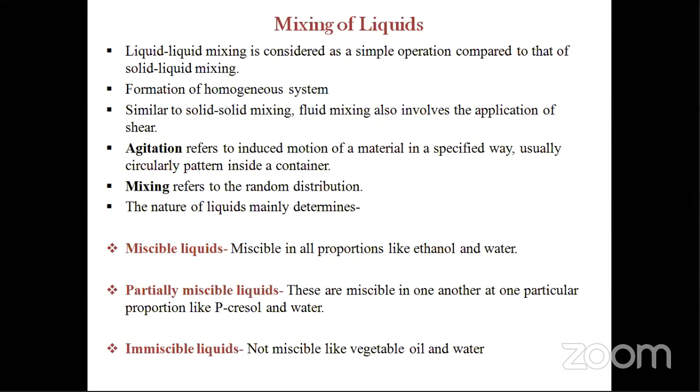Now coming to the applications of liquid mixing. What type of application is important in pharmaceutical industry as well as normal laboratory practice? If you are mixing two types of liquids, or mixing cold solutions, in between the mixing process you may need to give warmth to the liquid during mixing, or heat is produced during mixing. So you may generate heat using a burner during mixing, or another process is to directly incorporate a hot liquid into the cold liquid. When you incorporate the hot liquid directly into the cold liquid, both liquids mix with each other to give a homogeneous, warm mixture. By this process, you can transfer heat from one phase to another. This is the first advantage of liquid mixing, promoting heat transfer from one phase to another.

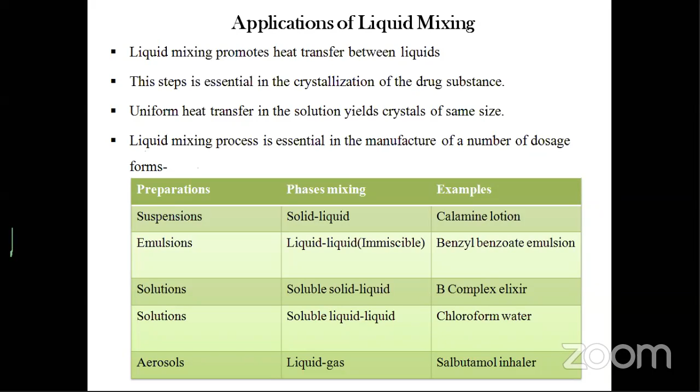So these are some of the popular dosage forms we can manufacture using mixing applications or the liquid mixing process.

Now coming to the mechanisms, what type of mechanism are we using in this mixing process? There are four types of mechanisms used in liquid mixing. The first one is bulk transport. Bulk transport means movement of a large portion of material from one location to another.

When it comes to liquid and solid mixing, what happens? A large amount of solid, due to the presence of liquid, transfers from one phase to another phase. Here bulk means the solid portion. If we replace the solid with immiscible liquids, when mixed, one portion of the immiscible liquid transforms from a large portion to smaller locations. This happens according to an ascending order, depending on concentration; the large concentration portion fulfills the criteria of the less concentrated portion. Large concentration moving into less concentration is called bulk transport. This happens during solid-liquid mixing or liquid mixing, and it is done using blades and paddles.

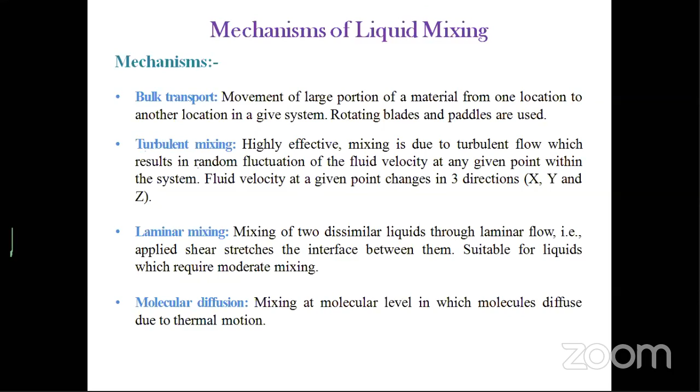The shaft is where the impeller is attached, and the shaft is connected to a motor. Shaft means a rotating device, revolving or moving during the process. The shaft is attached to the impeller and to the motor or drive, and this shaft is driven by the motor.

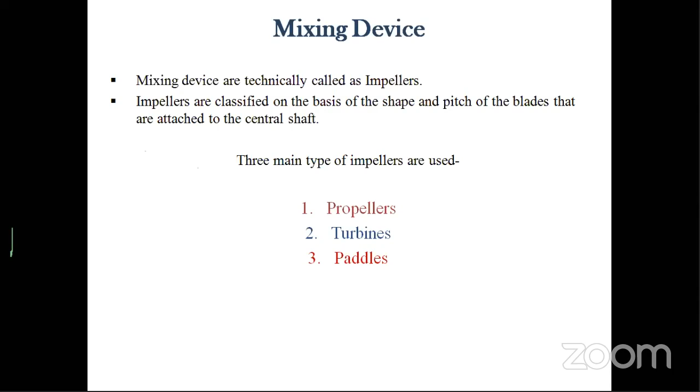First, coming to propellers. The propellers look like a table fan blade. But here several propellers are there. Some propellers have three blades, some have two blades, and some have more than three blades.

This has to be used depending on what type of mixture or what type of mixing process we have to involve.

Basically, standard propellers consist of three blades in nature. So the three blade design propeller is most popular in the mixing industry. The blades may be prepared by stainless steel, and it is right or left-handed depending upon the slant of their blades. Two or more propellers are used in the mixing deep tanks.

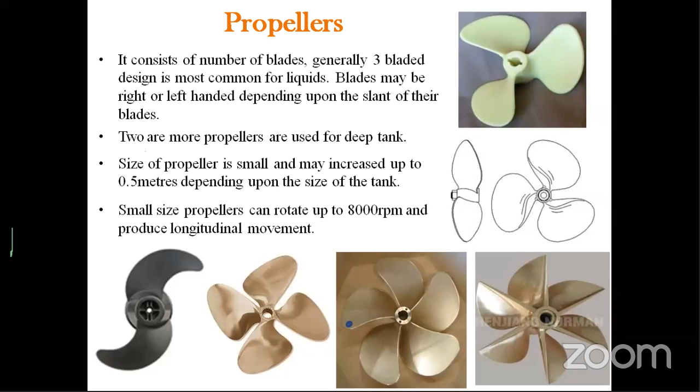Now coming to the advantages of the propellers. What types of advantages? It is useful for high mixing capacity easily. When you are preparing a high amount of mixture for high mixing capacity, you have to use the propellers in this mixing process.

Effective for liquids which have maximum viscosity of 2 pascals. If you are dealing with viscous liquids like glycerin, these types of liquids have a viscosity of 2 pascals, and if you have to mix a slurry or produce a slurry with these types of viscous liquids, you can incorporate propellers in this mixing process.

It also handles slurry portions where the slurry consists of 10% solids of fine mesh size. If any slurry consists of 10% solids, you have to mix it using propeller mixtures.

It is also effective in case of gas-liquid dispersions, which is possible at laboratory scale. Gas-liquid dispersion happens in case of aerosol dosage forms. When producing aerosol preparations, the gas and liquid dispersion technique is used, and this gas and liquid dispersion is done by propellers.

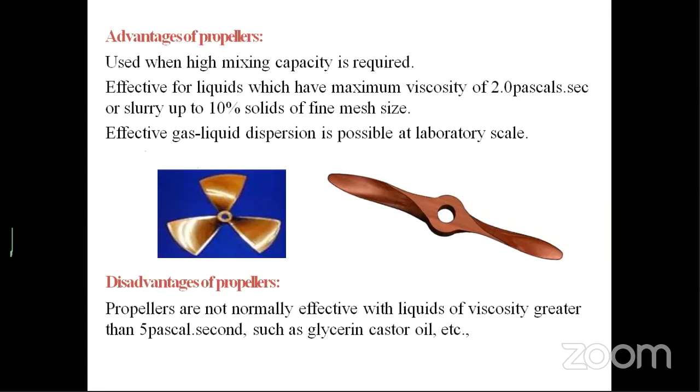In case of diameters, depending on the vessel, a maximum of 30 to 50% range of turbines is used in the mixing industry.

Turbines can rotate at lower speeds than propellers, 50 to 200 rpm, but their mixing process is more efficient than propellers.

Flat blade turbines produce radial and tangential flow. As the speed increases, the radial flow dominates.

The turbines create two types of flow: radial and tangential. Radial means it rotates depending on its axis or radius. When it moves depending on this axis, and the movement involves this axis, it can rotate radially, creating a force or flow, which is called the radial flow.

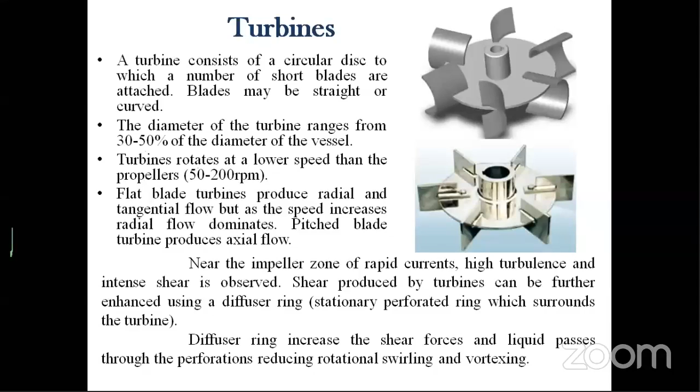Now let's come to the advantages.

Turbines give greater shearing forces than propellers, though the pumping rate is less. In case of propellers, if the speed doesn't increase during mixing, we can use a pumping device to apply extra shear force.

But in case of turbines, they consist of a circular blade attached with perforated or non-perforated blades. These blades help to increase the radial flow, and there is no need for any pumping device to create the shear forces. That's why it is the most useful device for emulsion preparation or the emulsification process.

It is effective for high viscous solutions with a wide range of viscosity, like up to 7 Pascal second, which can create the high viscous liquid. It is useful for high viscous liquids.

In low viscous material of large volume, the turbine creates strong currents which spread throughout the tank, destroying stagnant pockets. In case of low viscous material with large volumes, some types of droplets form during the mixing process, called stagnant pockets, and these should be destroyed during mixing by the turbines.

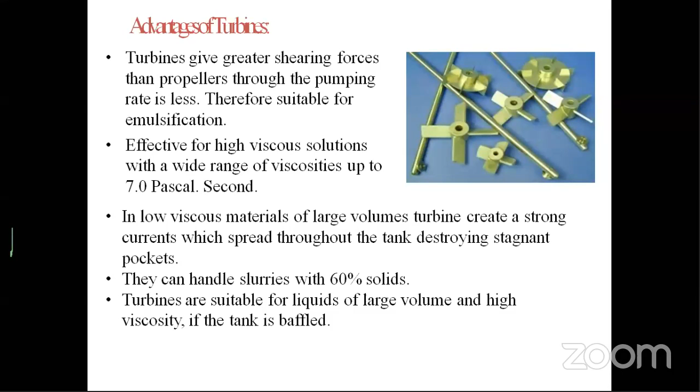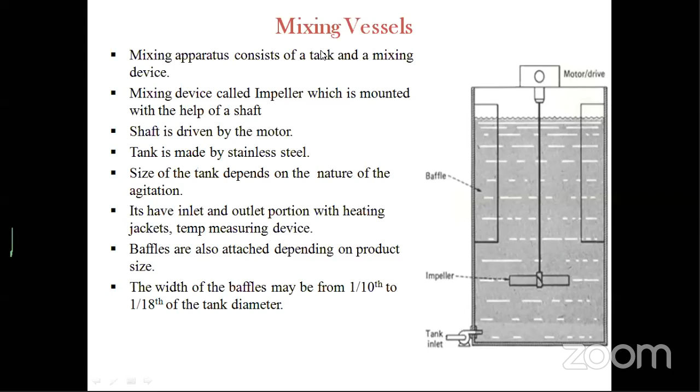হ্যালো স্যার, স্যার বাল্ক ট্রান্সপোর্টটা আরেকবার বলবেন?

বাল্ক ট্রান্সপোর্ট হচ্ছে, যদি নর্মাল ভাবে বুঝতে চাও, একটা জায়গা থেকে একটা মেটেরিয়ালকে অন্য একটা জায়গায় নিয়ে যাওয়া। আগের দিন রোটেটিং সিলিন্ডার বলেছিলাম, সেটাও বাল্ক ট্রান্সপোর্ট হতো। একটা পোর্শন থেকে সলিডকে অন্য পোর্শনে রিবন ব্লেন্ডার বা রোটেটিং ব্লেডের মাধ্যমে ট্রান্সফার করছিল। এটাই বাল্ক ট্রান্সপোর্ট।

ইন কেস অফ লিকুইড মিক্সিং, যখন কোনো সলিড বা লিকুইড মিক্সিং করছো, সেখানেও একই পোর্শন হয়, যেখানে হায়ার কনসেন্ট্রেশন আর যেখানে লোয়ার কনসেন্ট্রেশন। হায়ার কনসেন্ট্রেশন থেকে লোয়ার কনসেন্ট্রেশনে মেটেরিয়াল ট্রান্সফার হওয়াকেই বলে বাল্ক ট্রান্সপোর্ট। কনসেন্ট্রেশন সিমিলার হয়ে গেলে ট্রান্সপোর্ট বন্ধ হয়ে যাবে। আচ্ছা স্যার ল্যামিনার মিক্সিংটা কি বলবেন?

ল্যামিনার মিক্সিং মানে টোটাল মিক্সিং প্রসেসে ইউনিফর্ম মিক্সিং মেনটেন করা। ধরো তোমার মিক্সিং স্পিড ৩০ আরপিএম করেছো - আরপিএম এর ফুল ফর্ম হলো রিভলিউশন পার মিনিট।